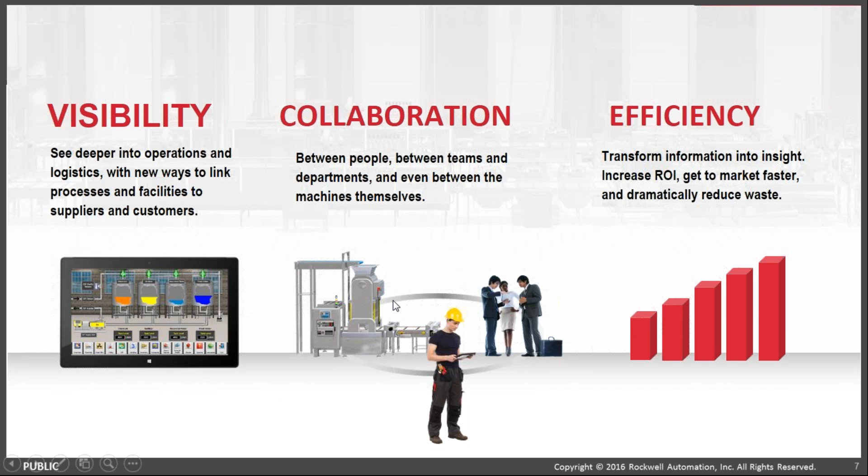The second thing is collaboration between people and their teams. And then once you take those two tenets, how do you effectively optimize that information into something that's sustainable? So contemporary technologies enhance our connected enterprise. That's the tenet above on this slide.

But as you all know, multidiscipline control we've been doing for years with the likes of our ControlLogix system and our CompactLogix system. We've introduced you all to secure network infrastructure with the services teams, as well as our hardware and what that may mean from a Cisco hardware collaborative effort with our Stratix line, as well as how do we digitally sign information on our Ethernet bridges, whatever platform they may exist on from an integrated architecture standpoint, rolling in through a motor control center type of solution.

Last year, we introduced a very strong effort for mobility and visualization. So we unhandcuffed ourselves from using Silverlight to an HTML5 solution set, to open up the use of portable devices like tablets and phones, so that you could contextually see information that normally would be shown on an engineering workstation or some sort of closed venue like that.

The two things we're focusing on this year that were prominent at the fair were scalable computing for cloud-based computing and information management analytics. Those two tenets fall in very nicely with what we've been promoting with the likes of our L8 and our 5480 products, which we'll get into today.

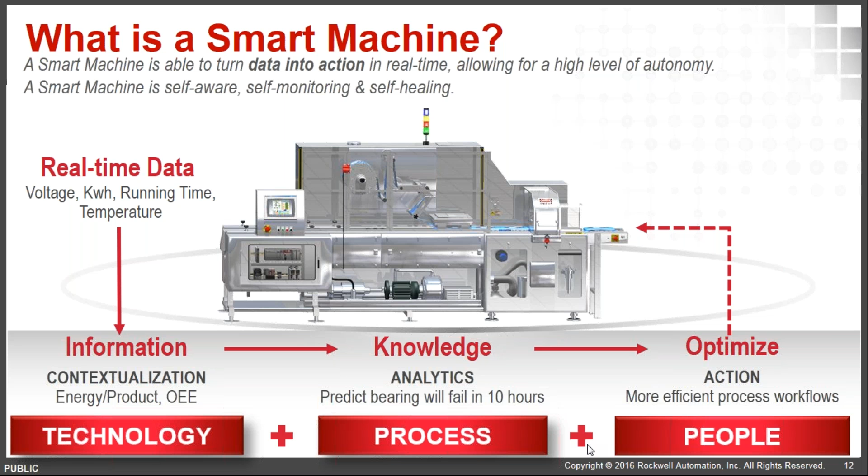Next slide. So we introduced, to give you a little tickler of what smart means from the standpoint of FactoryTalk analytics later in this presentation, those are separated into cloud-based computing, FactoryTalk analytics for machines and devices, and another type of analytic done using mobile technology.

The characteristics of smart machines allow us to access real-time information, log it, and analyze it quickly to make good, business-optimized decisions on our processes. It gives greater value for connectivity using secure network infrastructures, enabling real-time information to be shown, used, and collaborated both up and downstream of the process. Lastly, we add layers of security—because nothing's ever fully secure—to deter intrusive attacks on our control systems or entire processes, whether skids, plants, or platforms.

We want to make sure everyone owns their real-time data, but you have to be able to get at the information. This year's Automation Fair was focused on showing applications and use of products using our Ethernet/IP technology to show solutions, and I thought it was pretty effective.

Next slide. I said earlier you'll see this running theme of 5 tenets. First, make sure you're getting real-time information to better understand operation effectiveness and productivity at a lower level. The 5 tenets for improving machine builder information that goes into our end users, allowing us to eventually take devices and apply analytics, are all centered on the connected enterprise concept: connect, evaluate, collect the information, present it through visualization, and then optimize.

That applies not only to smart machines, but your control system, basic process control systems, safety systems, motor control centers or variable speed drives—having HART or IO-Link information at the device level, and mapping that down to a safety mat or light curtain that gives visibility into what may have tripped, whether someone opened a door and the interlock wasn't right to stop a high-inertia piece of machinery from cutting their hand off, or to stop a chemical reaction in a process safety solution set.

So again, be able to have massive amounts of data to cherry-pick the information necessary for your processes and machines to be safe, but more importantly smart, to make educated, informed decisions on your devices and processes. That's what smart machines and the connected enterprise is for Rockwell Automation, and what we're showing at the fair. I think this ends my section.

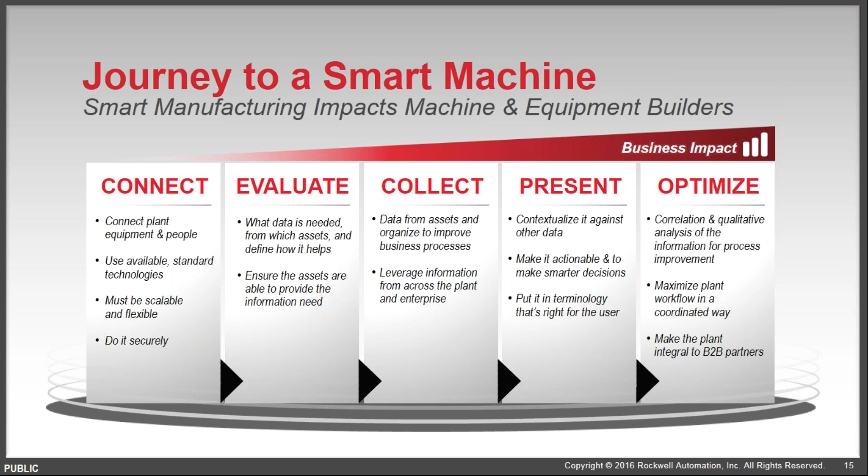We can jump right into the productivity tools. All right, thanks Chris. Next will be Bill with some of the best things on components, device level for the machine. Thanks, so yeah, we're going to jump right into the productivity tools.

For IAB, if you're familiar with it, you've probably used it on your desktop, but Rockwell has now put it on a mobile app. Wayne and I actually got to see it in use, and it was pretty innovative. The new thing coming out in the mobile app is being able to use it out in the field to help migrate PLC5 controllers and SLC 500 over to the CompactLogix.

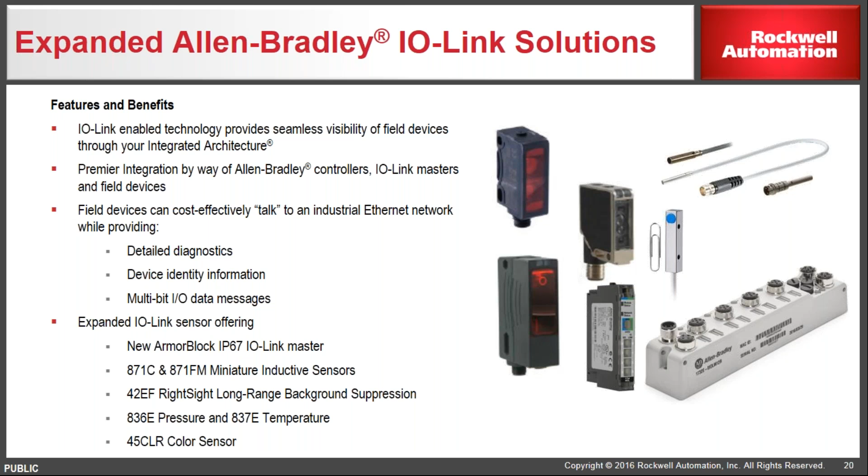So one of the first ones is this pressure sensor, and I'll pass this along. We have both the pressure sensor in the display version and the non-display.

Key features on the display model is that it's up to 8,000 psi, and the housing can be rotated 320 degrees, the head 330 degrees. It's IP67 rated also, so that's a good feature. With the non-display it's 10,000 psi. But the information you can get back is one of the key features because it's also IO-Link.

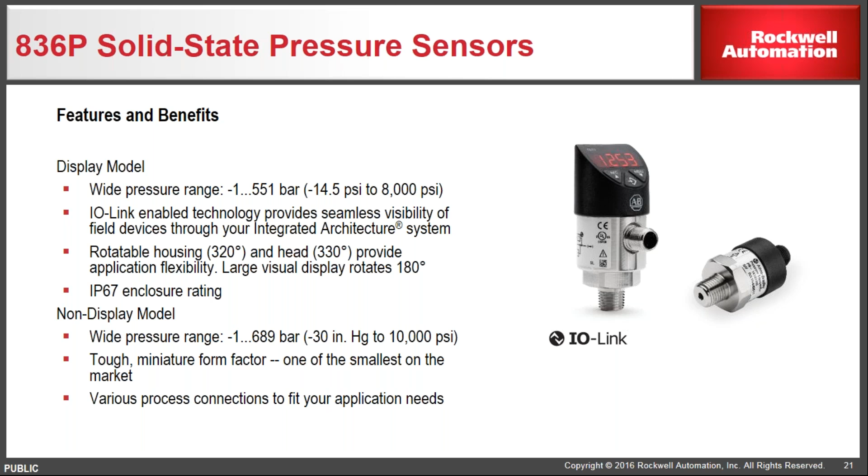And then right now, the temperature sensors, we actually have both the RTD and the solid state. The little one is the RTD one.

But again, there's a lot of information that can come back and forth. Temperature ratings up to 392 degrees Fahrenheit, so you can actually get a large amount of information back. Let's go to the next one.

Then they have the flat pack inductive proximity sensors, which are sensors you can use in certain applications that require small housing. This is now available in stainless steel also, so you can use it in harsh environments. So they're trying to address a lot of what the industry is looking for, as far as information coming back, and the sizing and capabilities.

Next one. And then this one is Ethernet IP. The reason why they used IO-Link technology is both to keep down the cost and to use available technology to get information back. With IO-Link, the protocol is that it's 20 meters between the actual master and the end device.

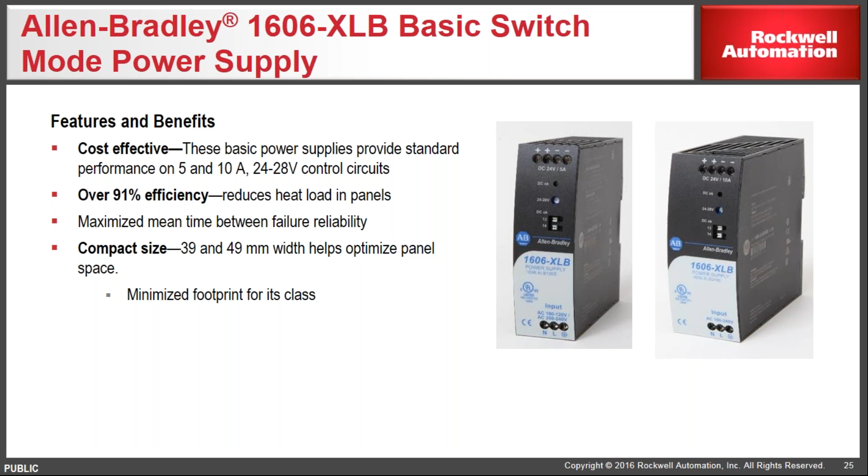I know that the top part is rated IP67, so some of the applications we know it's been used in, which is pretty cool, is trucks—it can be placed actually on trucks. One we're trying to get it into is a truck operation where they have a fish aerator in the trailer, and the driver needs to know the information because he's actually delivered dead fish a couple of times. So he actually needed to know, up in the cab, whether the oxygen levels were truly being provided for the fish.

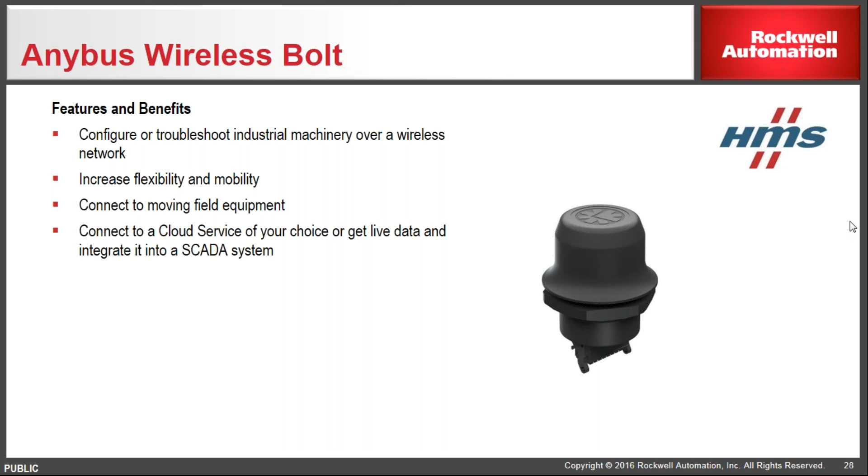Next one is Softing. Softing now has a Cable Master, which is able to test networks and coax cables. It's at a pretty good price point.

Up here in front of the audience we have a couple of samples of existing ones. One is a certified cable system checker, it's for both ends. One of our account managers here, Dean Bickerton in New Orleans, has it, and it's for rent, so if you ever want to use it—since it's a little pricey if you're only going to use it once or twice—feel free to contact him.

Another one is a cable qualifier, so that's another one that can be purchased, but the recent one is this Cable Master, which is great for testing and fault finding within cables at a pretty good, reasonable price, and you can get some reports out of it. Next.

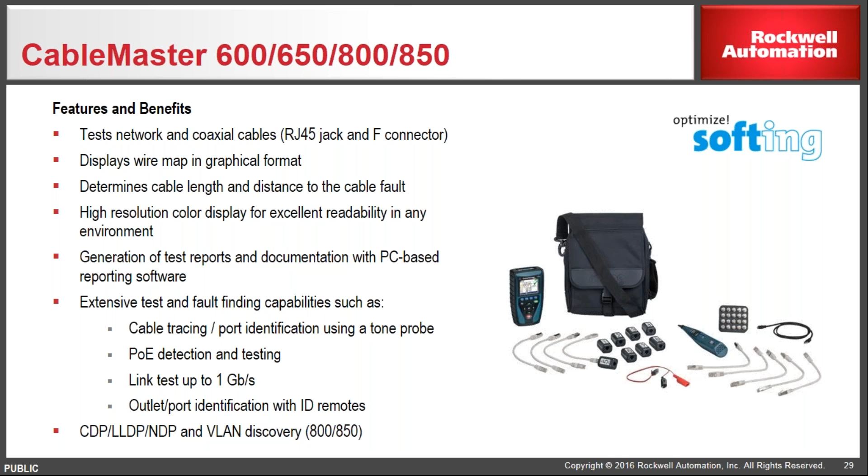And this one is Spectrum Controls. They have three new modules. One is an 8-channel universal analog input. This particular display here, back here, we actually have the 850 on top, and at the very end is the Spectrum 8-channel universal analog input. So that means it can be used for RTDs or any mix of inputs that you want.

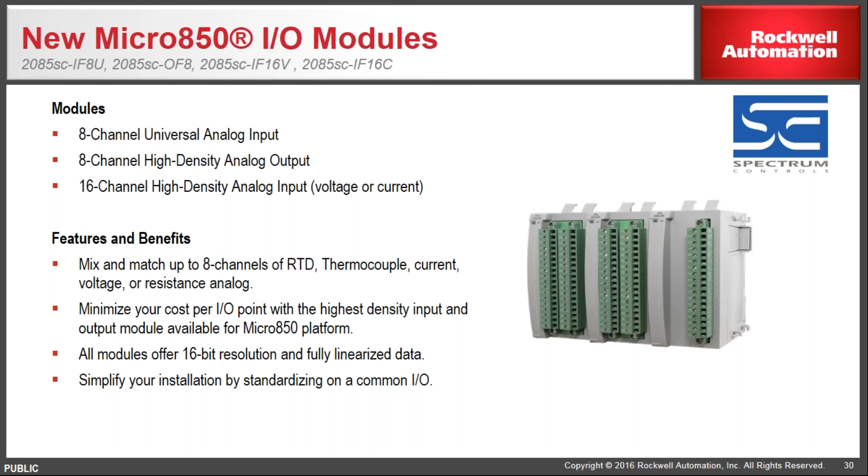Thermocouple. And then next is the Web-Port remote access. You can use this particular device to VPN remote access, to help avoid costly maintenance trips when you're trying to diagnose or look at a particular system. And I believe that is it for me.

So, thanks, Bill. The last portion of this will be the high-tech stuff.

So we broke this down into best in controllers, best in networking, and best in software. That's our last three sections here. I apologize, I know the web is lagging pretty bad behind what we're saying, so I'm not sure what our issues are today.

Best in controllers hands down would go to what is now the high performance automation portfolio. As of last year, the L8 controller for the ControlLogix was released at Automation Fair, and that was really it, right? We had one high performance product, and earlier this year the CompactLogix version of it came out, the 5380, and basically both of those...

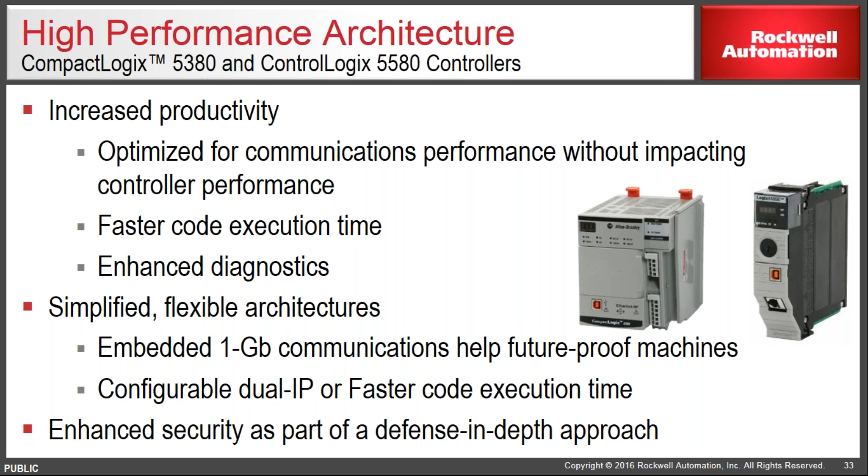A couple other things to note: this actually has 3 gig Ethernet ports on the front, and what's hiding underneath, if you rotate the product at the bottom, is I think a display port, so you can plug your monitor right into there. And I think there's one additional gig Ethernet port in the bottom as well that gets you into the host operating system. So a very unique product, something we're excited to see, because it's going to be interesting to see where our users take that product.

One more thing to add is there are 2 fans situated above and below that display, and they work in tandem to pull air through the 4 cores that are there, because it will run quite hot.

Those fans are detachable and will work independent of one another if there is a failure, so that provides extra assurance for those who run in warmer environments. This will be a closed room type deal, and we'll get into that, but just know those fans do exist. And if anytime you hear the word fan, that would pretty much rule out a Class 1 Div 2 type installation. But I think this is going to be a pretty interesting product.

I think we had a question right here in the room: does Rockwell provide the connectivity between that Windows IoT platform and the Logix?

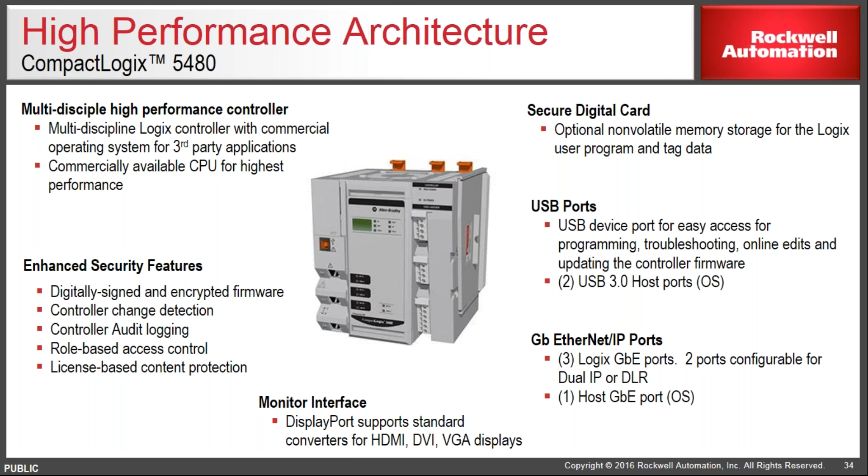Chris alluded to the 5069 I/O. So with these 2 new CompactLogix controllers, the 5380 and the 5480, there's a new I/O platform that goes along with it, the 5069 I/O platform. This picture shows you what it looks like. They stack it, this is a DIN rail mounted product, and they stack onto the right hand CPU, going on out. Again, performance is the name of the game here.

So the I/O has a faster throughput back to the controller, giving you high performance controllers and I/O. Again, for a machine builder, this gets back to the overall theme of smarter machines. So now you've got smarter machines, and now you've got smarter, more powerful controllers and I/O that can go on that machine as well.

All right, so next was kind of best of networking, and there's really two things that were highlighted at the show this year. Two new products, both with the Stratix branding in front.

First is the Stratix 2500 lightly managed switch. The 5700 is a fully managed switch, great product, but sometimes that was just a lot of switch for the application, right? A lot of horsepower and capability there that perhaps you didn't need. So the Stratix 2500 lightly managed switch is geared at that machine level where you don't need all of the full feature set of the larger switch, but it still gives you a lot of the capability you expect and need for your security and connectivity requirements.

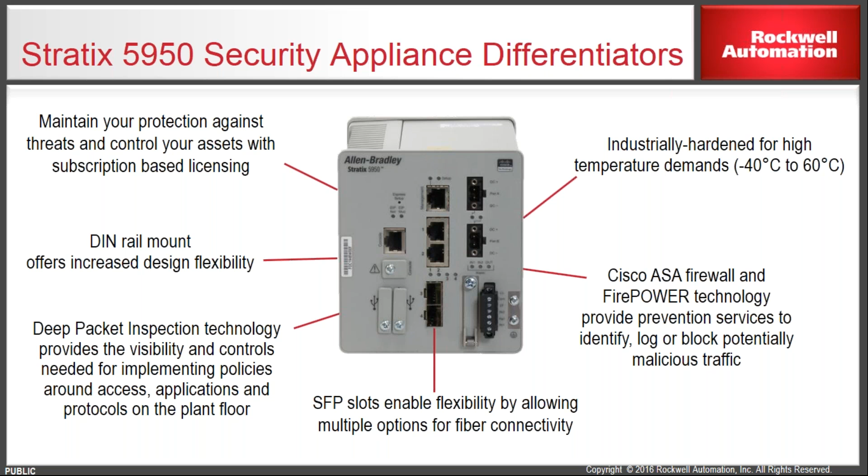And then when you want to go into the full firewall and the full deep packet inspection route, then you go into what's called the inline transparent mode. As the name alludes, it's inline with the data, inline with the network, and it's transparent in that data will just pass through. If it doesn't meet the firewall rules, or if it doesn't meet the deep packet inspection scrutiny, then it gets stopped right there, flagged, goes into the syslog, and you can detect that there's been an attempted intrusion.

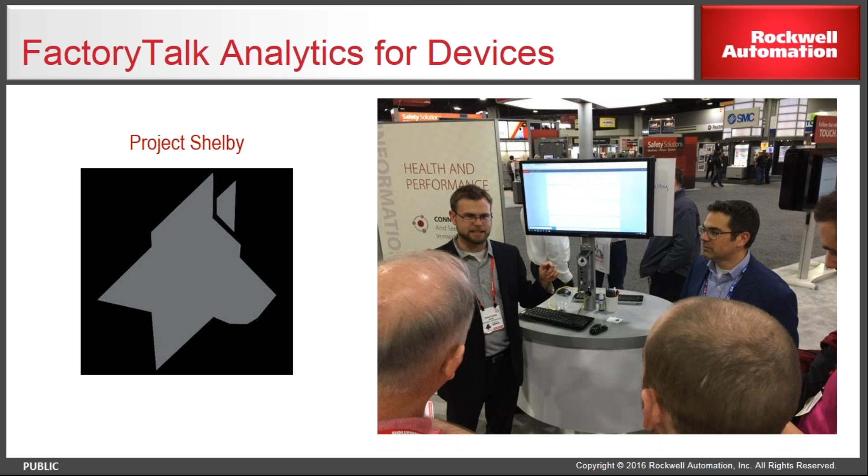Let's see, I'm going to push my luck because this video really helps summarize. So let's see if this will work. There is really no audio to it, just some groovy music in the background.

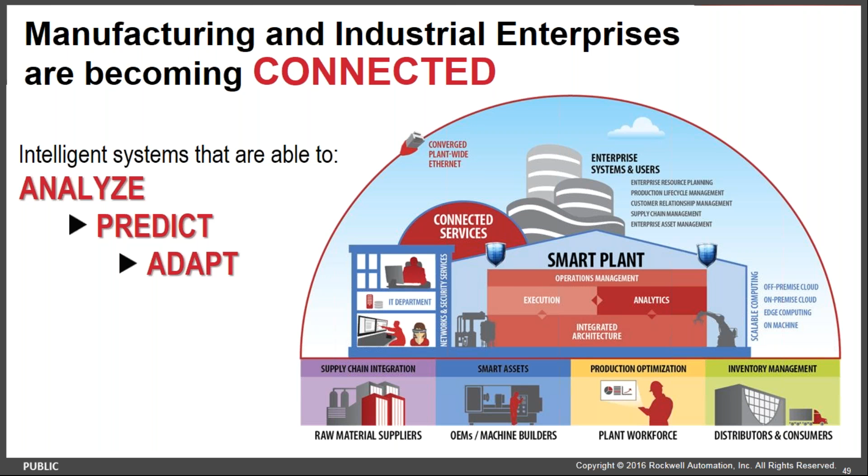So the next piece of it all is getting that data and starting to become predictive. It's one thing to know that real-time data, that's important. But now you have all this data, all this knowledge. The next big step is, can we predict things before they actually occur and reduce downtimes, or better yet, schedule downtimes on our terms and not on the terms of the equipment. So of course, the cloud.

I remember a couple of years ago we started talking cloud to our automation customers, and you would pretty much get laughed at a little bit. They'd say, 'Oh no, we're never going to go to the cloud.' And we always said, give it a couple years, it's going to get embraced. Like it or not, the cloud is going to be a disruptive force in manufacturing.

There will always be customers and people that will not want to put their information on some kind of cloud, but there are many customers that could see huge benefit from that. So the idea of the cloud now, especially thinking of an OEM or a machine builder, is that for an end user maybe not, but for a machine builder, absolutely.

You build a machine, you deploy them to your customers all throughout the world. If you had the ability to bring that data back from that machine up into the cloud, where you can access it anywhere at any time, you're going to become smarter with your equipment. You're going to learn more about it, you're going to reduce that downtime. The technology is there, it's been building for years. So the questions are, what if? What if you could drive higher availability and throughput?

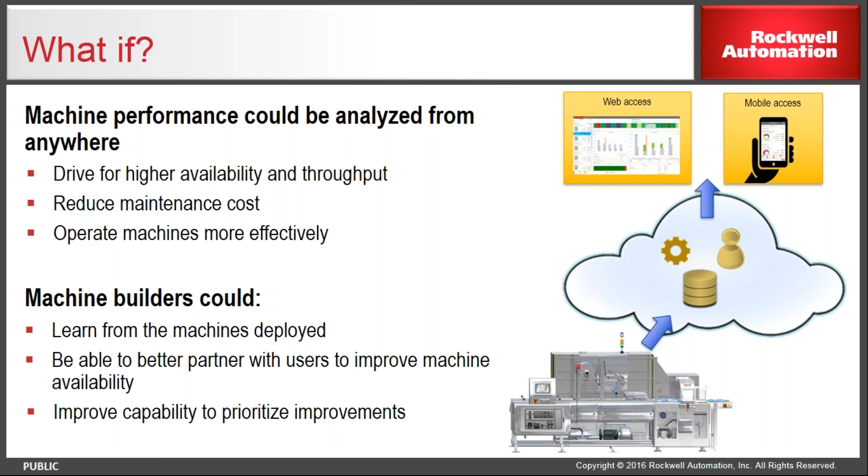Letting your customers know ahead of time, improving your capability, right? So that's the vision. And where Rockwell is going to take us is what's going to be called FactoryTalk Analytics for Machines. So again, you have a device, some kind of smart device on the plant floor. There will be some kind of gateway between that device and the cloud. Then you have the cloud, which will be data storage, processing, dashboards, maps.

And then, of course, the analytics piece, which is kind of that user front end. Being that it's a cloud tool, there really would be no additional software. You're looking at usually like a web interface, so it could be a mobile device or a computer.

We actually have a demo, and it's still up, of what this could actually look like. This was a demonstration that was done at the Automation Fair. And so here, again, the map, right? We can see all of our machines that are deployed globally. We actually have something in China, apparently. That wasn't on the map yesterday. That just showed up.

So if our web is going to cooperate with this, at some point we'll get to see the status of each of these machines. A simple little color-coded pie chart to show amount of time up, amount of time down, through various explanations of why that machine is perhaps not functioning at full capacity. Looks like we'll maybe let the thing spin its wheels for a few minutes. Try to come back to that. I know we're actually a little past our time here.

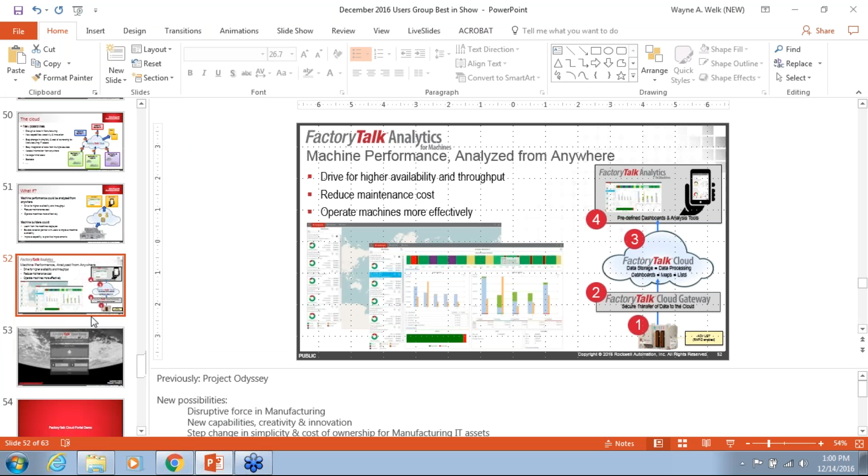So last but not least is TeamONE. So now, we were talking a minute ago about cloud, connecting various machines all around the world to a cloud. Here, the idea of TeamONE is about connecting your team, which is why it got its name. So this might be more geared for an end user inside of a facility type. This may not necessarily be something you would want deployed like machines are around the world, bringing data back to the cloud. This is more for think of your team internal to your organization.

So it's an app platform that's been developed from the ground up by a Rockwell development team. And again, it was kind of a little bit of a skunk works deal. They took a team off to the side and said, you guys go build something, and they did. So the idea here is you're trying to marry the human data, that is your everyday operations, communication to your team, to your device data. So if you could figure out how to bridge that gap, get the device data out of your equipment, and then interface it with your human world, and do it in an app platform.

And a couple things that's been big to this. Say, okay, let's say that's no big deal, right? We could probably do that. The idea of this was twofold. One was, and you'll see if you look at any of the marketing around TeamONE, they say 33 seconds. So the idea was if we could get you back 33 seconds in every hour, what kind of productivity saving would that be to you? So in a very large end user, 33 seconds per hour for every employee, that adds up to big productivity.

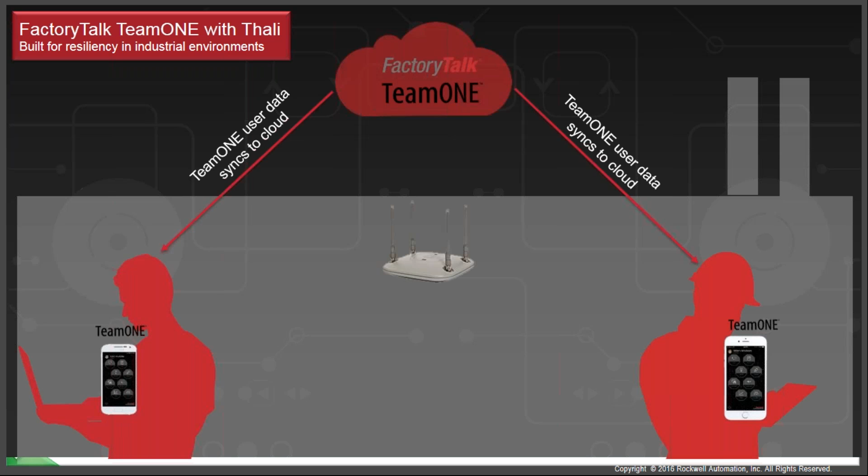So what would happen here is you have your users, and there would be an initial sync up to the cloud to get everybody connected to the right team. But after that, there's really no need to ever connect outside of the plant. The device communication would all stay within the plant, and your peer-to-peer communication with Thali enabled could all be inside the facility in its own mesh network. The cloud, at that point, would basically be like another peer in the mesh, so you can have a cloud connection, or you don't have to have the cloud at all.

Interesting concept, this is just getting released to the world. Right now it's actually in the App Store, so you can go today, download it, and play with it. You can create a free account for a period of time and connect and make a little team at your facility. Then at some point early in the year there will be a subscription service, a yearly fee to enable the TeamONE. And later in the year that Bluetooth mesh capability comes in. We'll definitely have more about this as it gets further along.